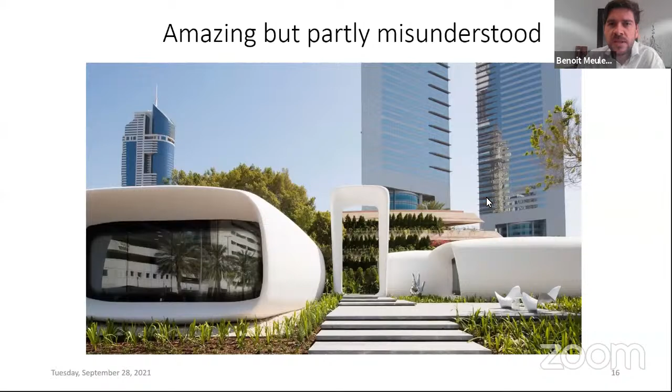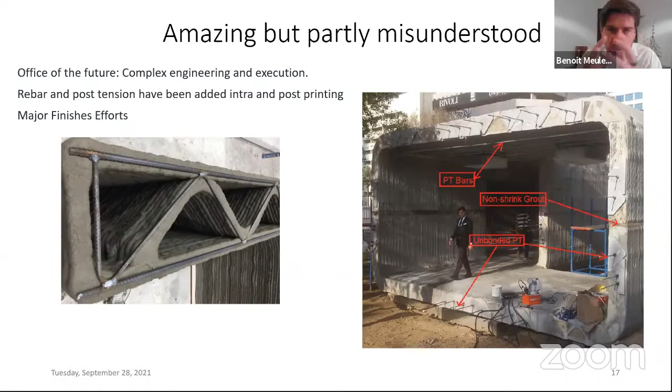Unfortunately, in the image of clients and probably worldwide, people thought that this piece was fully 3D printed, where in reality, well, it's still concrete, right? And concrete is not able to take tension. So when you start to do buildings or elements like these, it is much more complex than some people thought. In the start, where they just jumped into it, they soon realized they had to add manually some reinforcement, come up afterwards with joints, with non-shrinking elements, with post-tensioning. All of these elements, if you look at the details, are far from our dream of just 3D printing a building. Also, a lot of finishing efforts needed to be made. So you can definitely imagine that between the expectations and the reality, this was much more complex to execute.

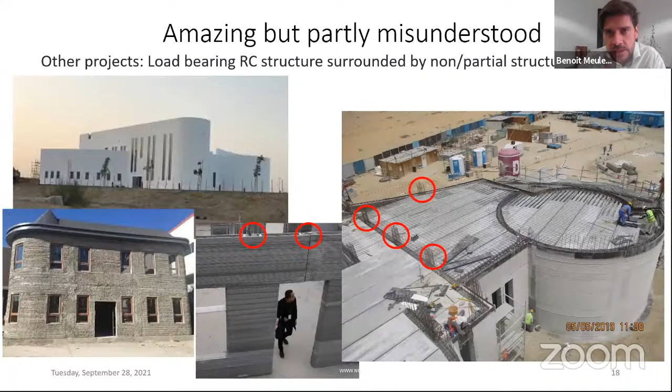We kept going, and in the region also, Dubai municipality has built the biggest concrete 3D printed building, 2 levels, and that is a tremendous achievement. Again, partly misunderstood, because these buildings still have to use common traditional reinforcement to be able to get all the load bearing. So within that building, as soon as you go out of the 3D printing part, you enter into a whole more complex system, and you still needed to find a lot of details to be able to incorporate windows and other elements. I think it's very important for people to understand that you still need, in some cases, traditional methods within the element.

It was the same with the first bridge, which was also supported by TU Eindhoven. There, for the bridge, it took more time, but the difficulty was the volume used for the project. We didn't fully know the quality of the material, and physical testing was done. There are very interesting articles about it. Basically, we have been, or they have been, very conservative in the design itself, because it was the start of the technology.

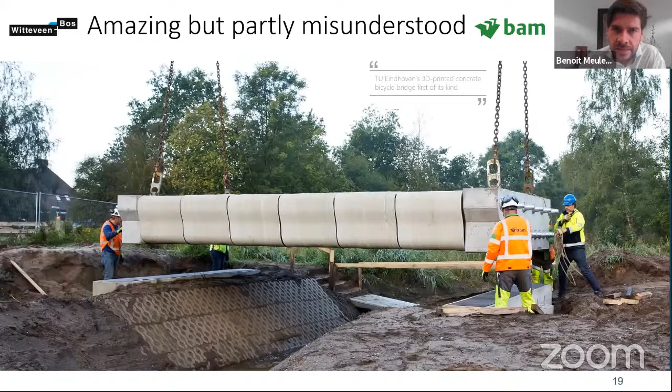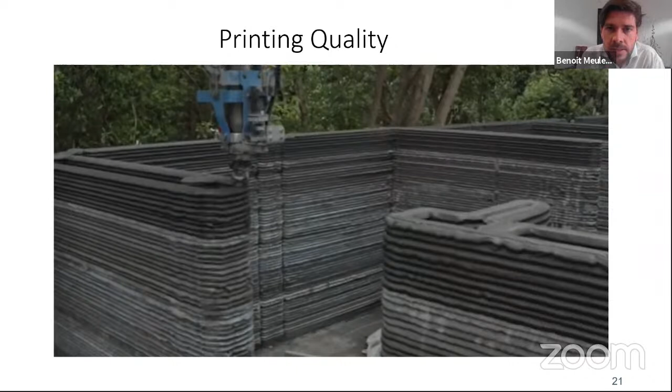Another big issue is that we said we can print everywhere. Well, in the beginning, the material was not able to sustain the environment, and some of the first printing had to be done within a tent, in a controlled environment, and some of them had quite some issues in terms of cracks. Again, you are disappointing a client who thinks everything is running smoothly, even though this is still pioneering. Same with the quality - you expect 3D printing to be smooth and beautiful. Well, not always, and it depends on the application. I think, again, this was in the beginning something that created a bit of disbelief.

So now, on top of it, and I think this is overall in the market, coronavirus hit us. And when you are a new technology and innovation, the pandemic is not the best. A lot of companies have seen cost cutting, a lot of projects have been put on hold, and that has also created some disbelief, or people turning a bit away from 3D printing.

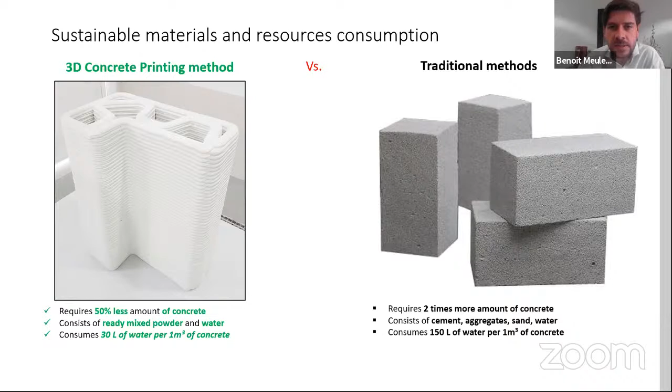In terms of advantages, if you look a bit more into detail, in terms of sustainability, yes, it requires less concrete for the same type of wall. Obviously, this concrete is cement. So in terms of volume of cement, it is wrong to say that 3D printing is going to bring way less cement today. But you will see a bit later on in the presentation that still in terms of sustainability, we are just mixing powder with water, and we are consuming less water, and the aim is at the end to consume also less cement.

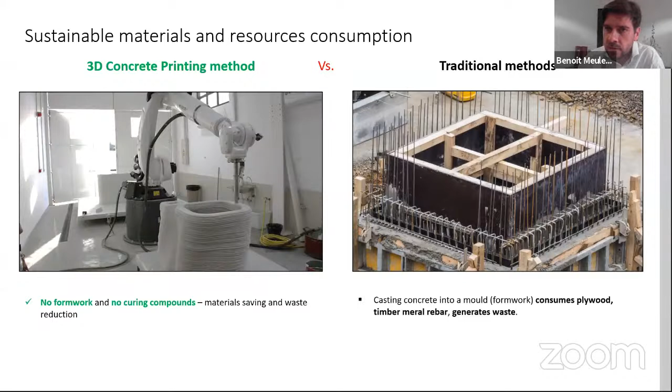We are also avoiding having molds or formworks. This is just based on a robot and without any formwork. That is quite a big advantage also in terms of safety, in terms of labor.

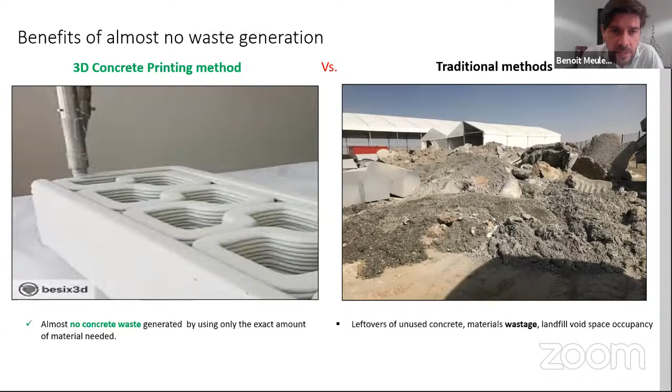Now, on the traditional method, you have quite some wastage if you go on the site. Well, with 3D printing, we are controlling that waste. It's extremely limited, or it can be reused. I think that's also quite an interesting one.

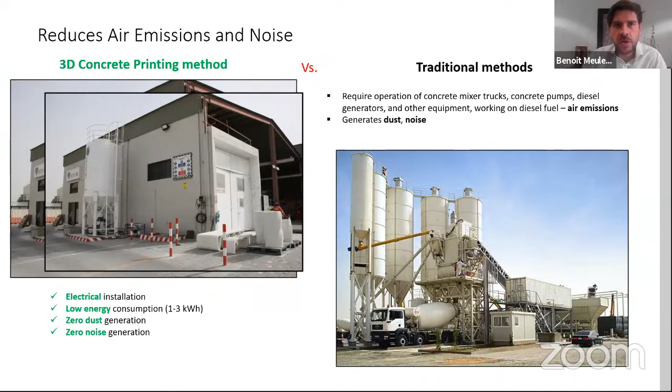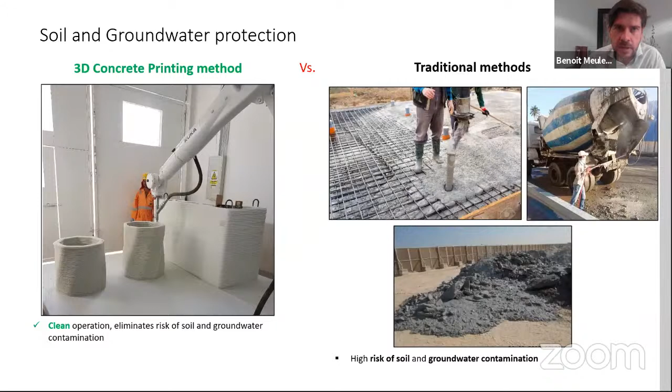And then you have other advantages. You are able to generate less dust and noise, and your system is in a certain area quite controlled. Now, in terms of pollution, also, as I said, you are controlling basically where the concrete is going, and that limits a bit the cases, as you see there on the right. So there are really noble aspects within the technology, and I think we should never forget them, because these are today in the world quite important.

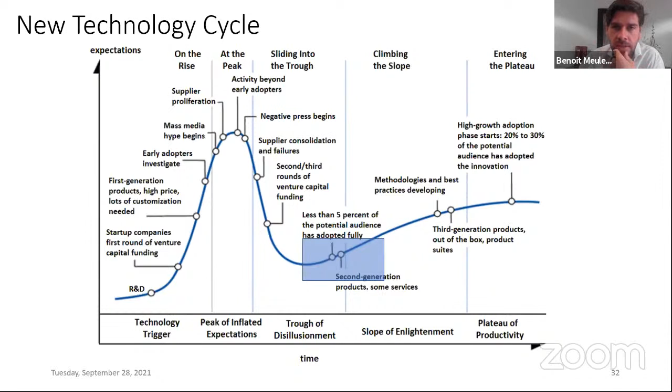And that's why I believe that we have an opportunity to come up the slope and go back to something that is productive and to a real product on the market. On top of that, obviously, we have had quite some improvements and a kind of second or third generation of products, which clearly demonstrates for me that we are coming into that slope.

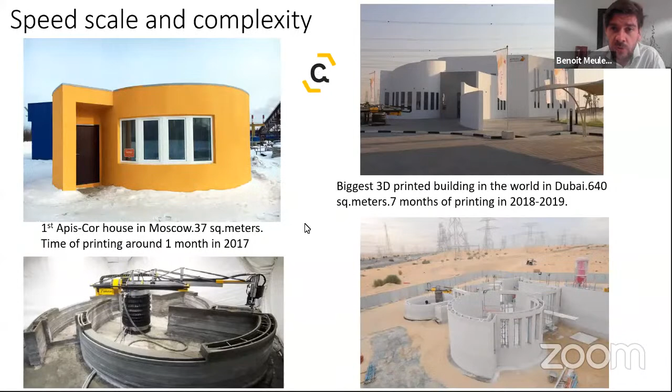Some of the projects I'll go through quite quickly, but it's just to show you that the scale and the speed have tremendously improved. Even though there has been some disappointment on the speed before, now we are able to print quicker, and we are able also to improve the quality and to do things bigger. So the scale, this is just for buildings, of course, has improved. Now, as I said, the speed, but also the quality.

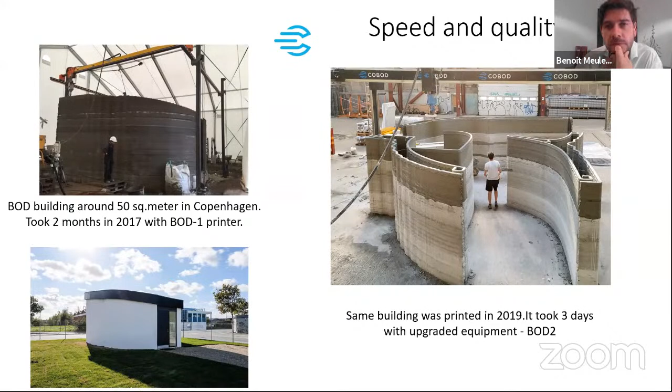So if you look at the material, we have quite some people today, and we have our partner here in the region, with which we have developed a specific material for the region, Sika, that have done a lot of efforts on getting a material that is today, as you can see here on the picture.

You have people like Apis Cor on the left that have worked on the material and on the printing process to try to get smoother lines, to try to get smoother walls and not see really these bubbles or this layering system. They are not the only ones, but we are able today to achieve overhangs, different colors, different systems, and a very thin, precise printing.

I will not go into the different systems. For example, Sika has a one component or a two component system. These are things that I'm sure you can go and look for yourself, but these are explanations of why you see some differences in quality. It doesn't mean that the concrete itself is of a lesser quality, but it's just a visual that is also impacted.

Obviously, the printing path on a house is much longer, so it has to be a bit faster, and the properties of the material are a bit different than if you are just doing a small piece with a very quick overhang.

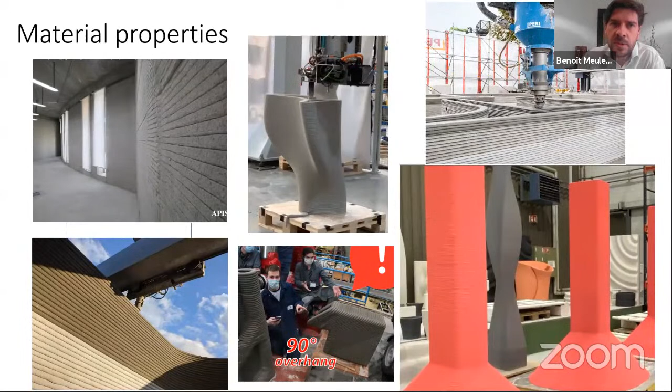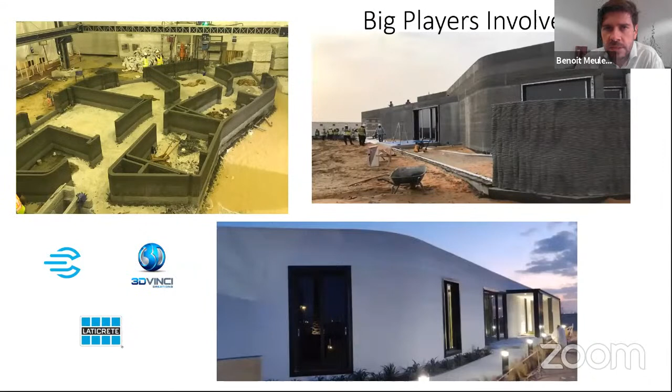Now, there are some projects in the region that have been pushed by very big partners. These projects have sometimes been in the press, but they're not released yet in Dubai, so I'll just skip it. But you're sure to hear about it very soon.

Now, another very important point is that today we get to have the first inhabitants. Projects in the US, a project in Holland like the Milestone project, and also in Germany. Some of these projects today are completed to a stage where they can be sold and lived in, and I think that's a very big step when you see interiors today with all the details that feel quite comfortable as a house. These are two different houses, but you see that all the elements are quite well integrated within the house itself.

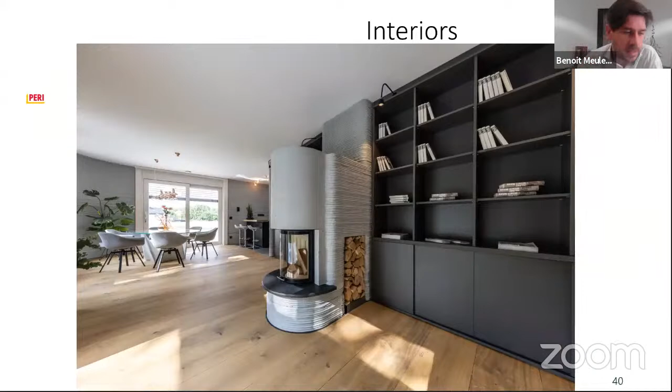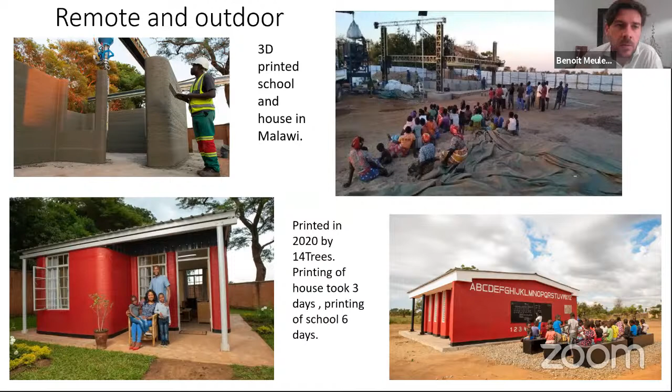Now, we are also printing easier outdoor, linked with material, and also in remote areas, again with a very good aim for the planet. Here it's to support regions that are in difficulty, where we can help, and you know that in some regions they don't even have schools. So this is an example for me where we are doing good again with the technology.

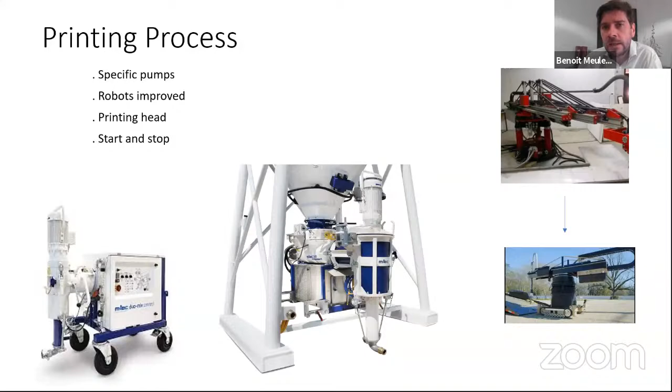Now on top of it, obviously the printing process has been improved. We have improved the pumps - they were first from plaster companies, and they have now really been pushed towards 3D printing. The robots have improved - now they can move, they've been reinforced, the length has been extended, and the printing heads have been changed. We also developed, for instance, start and stop capability. Before, once you started printing it would continue. Now in some processes, you can actually stop and start when you want, and that is more and more controlled, so you're able to achieve better shapes.

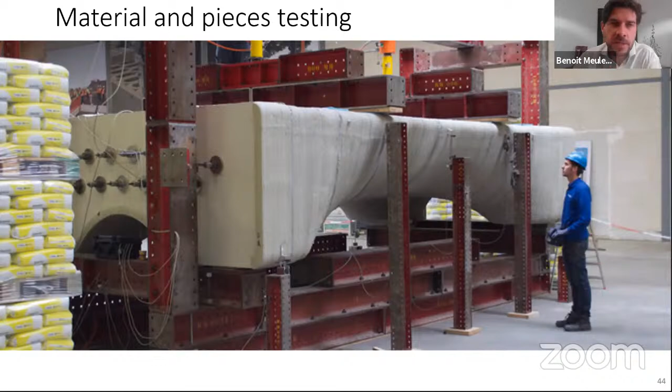On bridges, we have also had tremendous efforts. This is in Holland, the same team as the first bridge I showed you. We've improved in terms of testing and material, in terms of optimization of material use, and we've also improved the whole system of placing - the connection between the elements. There's quite a big logistics link to these projects, but once the logistics are in place, the placing goes quite fast. As you see here, the bridge is quite a nice result.

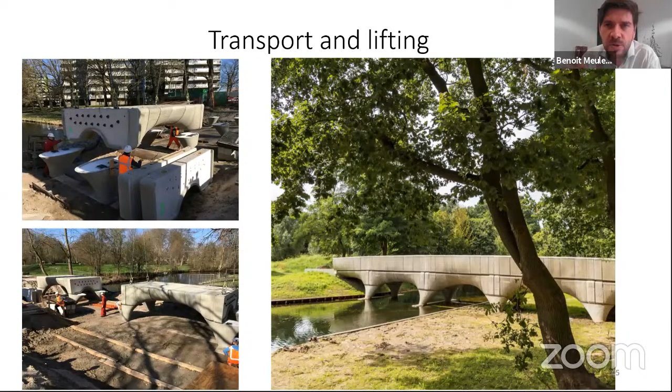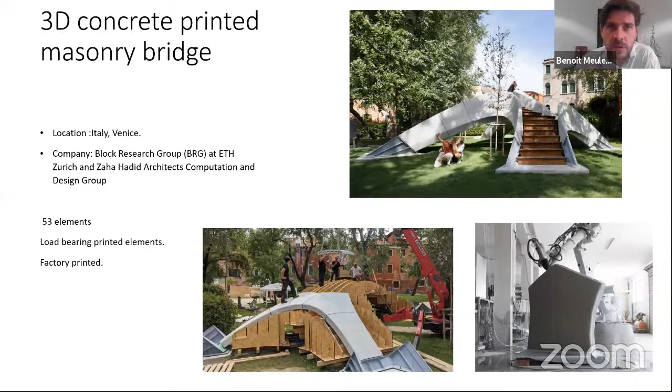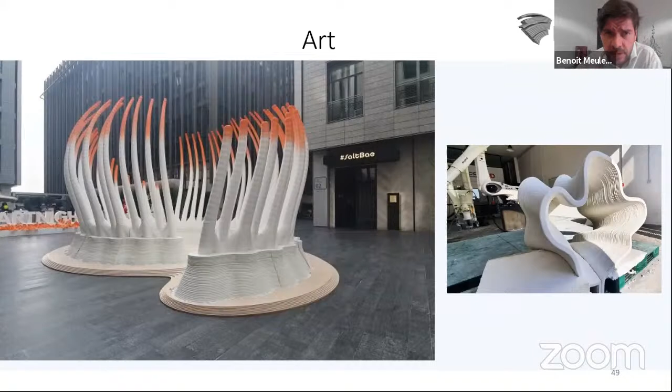And then you get, I think, still very important applications because they push the technology a bit further - some art pieces and some very specific shapes. On top of that, you also have elements we call urban architecture, or even indoor furniture. You see here, and I'm sure you've seen some benches - here it's a picture from the expo.

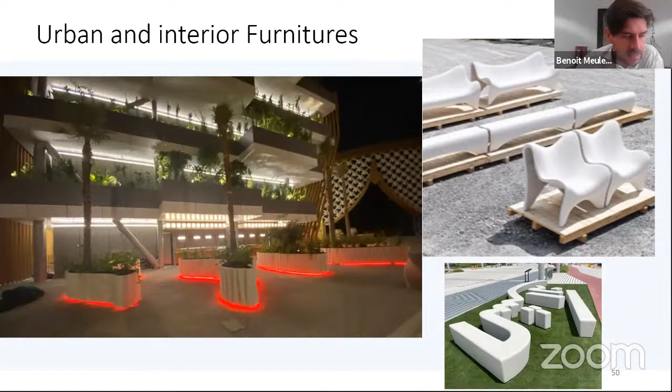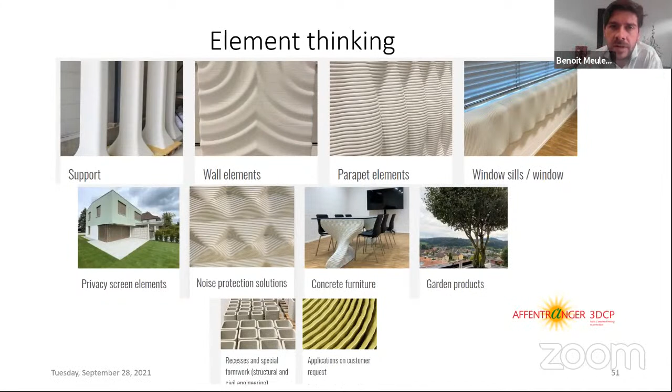So all of these elements today you will find on the market, and they are getting more and more shown and used. I think it's quite important to have that element aspect in mind instead of having the full project in mind.

Now, I will go through a case study because I think it's quite important if you are not really familiar with how a 3D printing project works.

A classic project, let's say, you have an architectural intent or a client idea. The first thing you do is look at the feasibility, and obviously you try to get a budget out of it. Once you have that setup, well, you try to have a design.

Obviously, that has to be as per the regulations. You integrate all the different trades — structural, MEP, geotechnics, you name it — and then you start the process of the project. You have material, you test your material, you explain how you're going to do it, you get the approvals, drawings, and then you do the execution.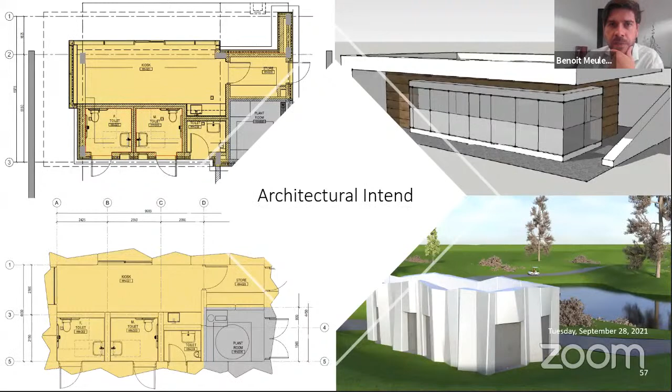So how did we approach this? Well, as any other project, we tried to design in terms of elements and think about what were the different opportunities for this project.

It is a small project, so we were able to push a bit further the approach, and we went with fully load-bearing walls to try to get rid of that traditional reinforcement throughout all the pieces. And we've done a design.

We were supported by AECOM. We've done a design according to the ACI for plain concrete — the same principle is also applicable in Eurocode — and the rest was also done according to the ACI. So how do you calculate the loads, the wind, the seismic, and everything? And we've made, again, a design according to the codes.

Now, the only difficulty sometimes in some projects is that the design itself, or the code itself, is not really validating your project. And for that, you always have a way out — and the way out is by physical testing.

So you can do a mock-up and do trials to demonstrate that you are reaching basically your characteristic values that you are considering in your design. So you see on the right-hand side how for this small project, all the MEP has already also been incorporated and thought about.

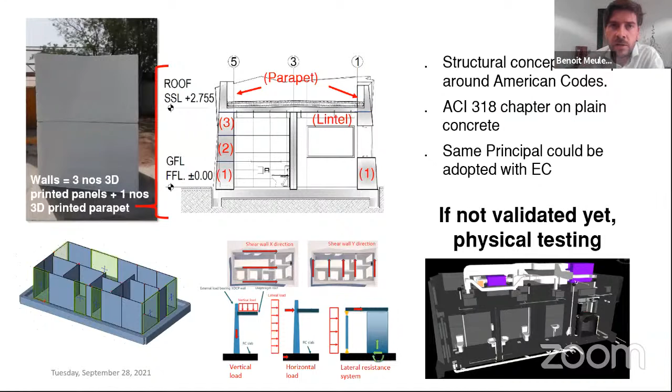Now, in terms of material, just to explain a bit the impact of the process itself: the idea is to do testing that everybody is very familiar with in construction. We do compression tests, flexural tests, for example, and we also are modeling these elements.

Now, whether you print or whether you cut an element, having the printing in different directions still has some impact today, though it's becoming less so as we master the behavior of these elements more. There is quite a lot of research ongoing, but you need to be careful about the characteristics you use within your design.

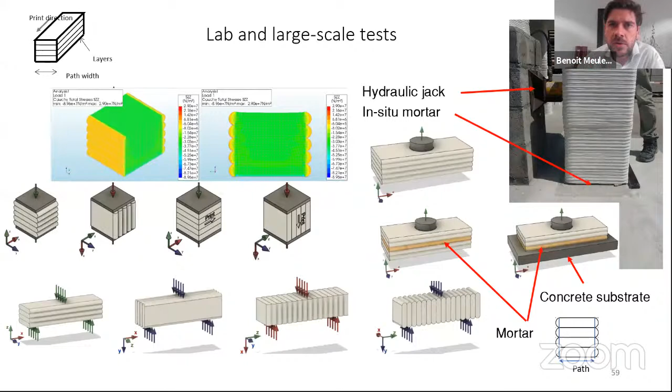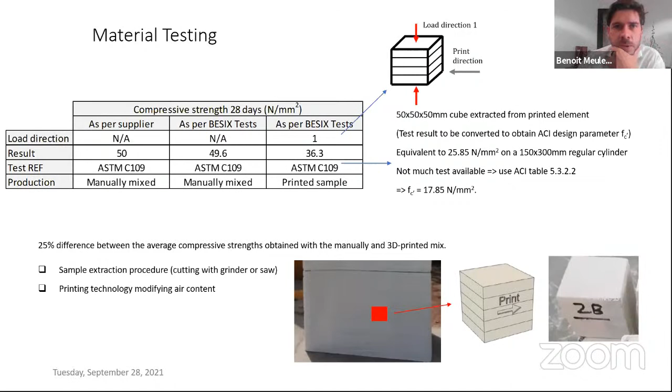This is just an example we've done for the project, and the tests we use are worldwide known. We used the classical ASTM test. The idea was to understand the relationship between the announced resistance and what we were actually getting while or after printing. You see that on compression, there are some differences.

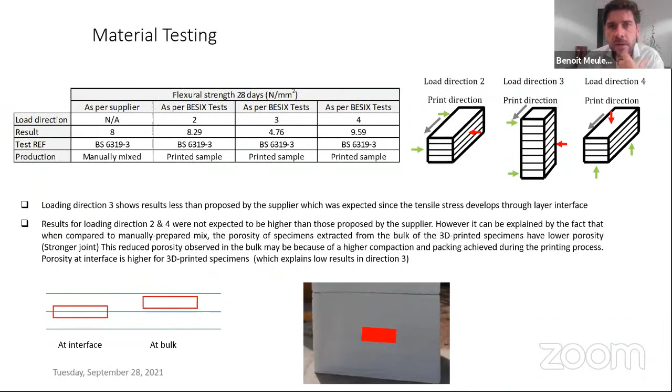Obviously, on the flexural tests, depending on the printing direction, you also have some differences, but it helps you master the pieces and the design itself. And you can then agree on what parameters you use within your design.

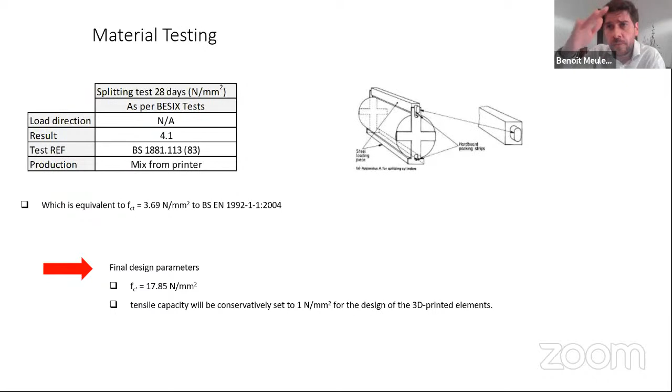At the end of the day, that demonstrates enough to get a certain approval. So that's the whole path we've been through. I'm going quite fast, sorry for that, but I don't want to go into too much detail. I'm sure if you're interested we can talk about it.

Now the next step is very important - you need to deal with someone who knows the details. Some elements, like the slab, are much more difficult to print. There is research on printing slabs, but this specific project used a classical slab that we had to connect to the printing element. So you need to work out your details and specific elements - think about lintels, for example, and the splicing between pieces to understand where you go.

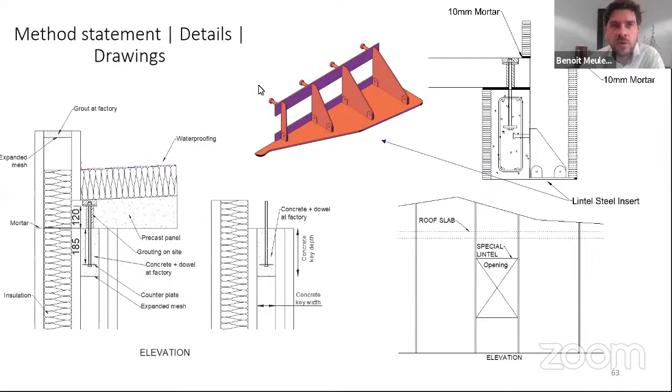If you're using a gantry it's a bit different - you have specific formwork and just print on top of it. But this is where you can verify you're dealing with people who know what they're talking about - people looking into material, looking into testing, looking into details, and showing you on drawings how it works. That is very important.

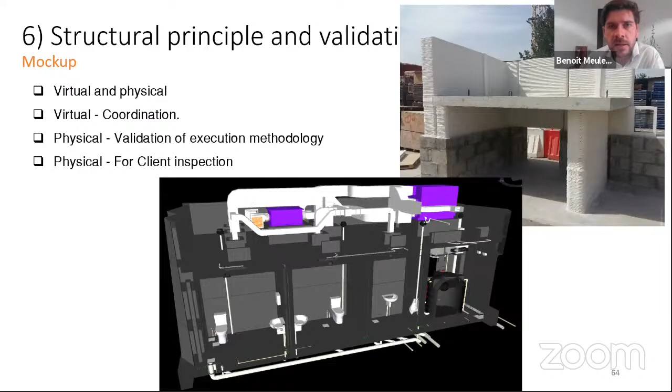We pushed it a bit forward on this one, running a test to demonstrate to the client both the visual and the capabilities. Again, we had some materials - we did this with Sika, and some of the material for the joints was also discussed and developed in partnership with our material partner. So this is the end result.

And I think as per the first client request, it needed to stand up, and I think it does. It's the first in the region that is fully load bearing and approved, and it's soon going to be open to the public. You see also the details inside that have been quite well done. So for us, it's one of the examples - I showed you others, and I'm sure every project has its benefits, but it's just to demonstrate the whole path of how you get from an intent and an idea to the end of the project.

Now, one of the major points I mentioned differentiating traditional construction and 3D concrete printing was the lack of regulation support.

In the region, we have that push which, as I mentioned earlier, was started by His Highness Sheikh Mohammed, and he has recently - I think it was in August - pushed a decree forward to regulate the use of 3D printing in the construction sector. They have tasked Dubai Municipality to look into this, so it becomes more than just talk - they are really pushing the technology forward.

On top of that, you start to have work groups linked, for example, with ASTM. There's the joint group, which I'm also part of but is led by Stefan, that is really trying to bridge the gap between the construction practices we are familiar with today and construction linked with 3D printing. What we want to avoid is people doing 3D printing without thought on the construction process or material, leading to failure at the end. So our knowledge of the construction industry can really be brought into this technology.

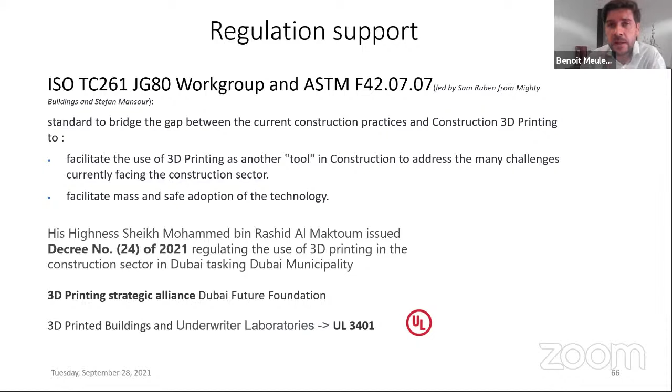Another interesting one is the stamp from Underwriter Laboratory. They are working under UL 3401 to try to get a validation of your 3D printing process overall. It's kind of a standardization, but this is really important to push the technology forward and to give everybody the chance to get something certified that at the end of the day can be constructed.

So I'm reaching the conclusions. I hope I've been able to show you how the community has grown quite a lot, how the partners are still the same and new partners are coming in, even having passed the trough of disillusion, as I call it. The processes have improved, the knowledge too, and if you look online on research, I invite you to see some PhD developments in Ugent, in Leuven, in Zurich, and I'm sure there are plenty in Germany, and probably even in this region. I've seen some research. So this is really booming.

A big one that is extremely interesting, I believe, is that the business models from these different partners have now become more clarified. So you have engineering, people specialized in telling you, I can calculate your element, I can print your element, and I have the software to demonstrate that this is printable and can take the loads coming. Then you have printer development, where people like COBOD, for example, are focused on developing the printer itself and selling it to you. So their business models have become clearer and clearer.

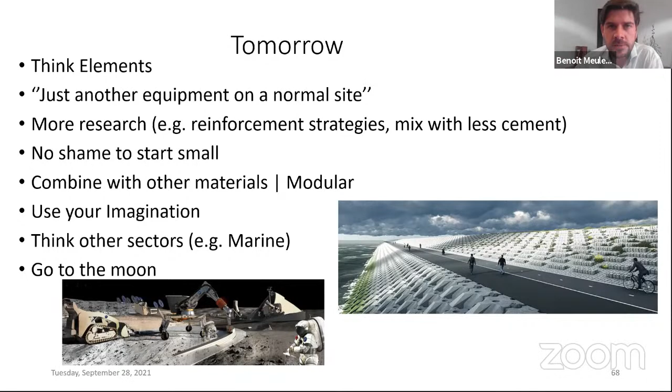And you know that NASA is pushing the technology quite a lot to think about how we can bring robots to the moon or even to Mars. I'm going to end up on this. Thank you so much for your attention, and I hope that I've been able to enlighten you a bit.